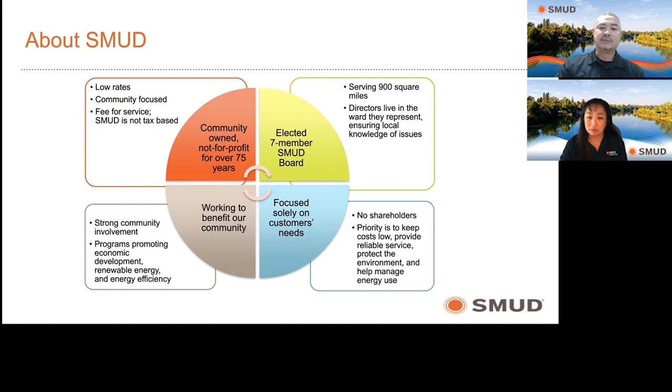One of the many things that we do as energy specialists besides doing the home energy audits is we provide classes and resources to our customers and community engagement. So some of you might see us out in county fairs, the state fairs, or regular regional fairs or events with our SMUD tents, providing some information to our customers.

Our energy assistance program rate is our discounted rate for income qualified customers. So it's based on your gross income and the size of your household, and we generate those numbers based on the federal poverty level. So those are some of the numbers and guidelines that we use to qualify you for our discount. And this is a monthly discount that is taken off your utility bill each month.

There is a recertification process. Once you get enrolled, every 2 years, we will recertify and just ask you to provide updated income documentation to see if you still meet the general guidelines to earn that discount. And as you can see, some of those discounts vary from $10 all the way to $70 a month off your SMUD bill.

So which means that, if you have a $100 bill, $70 is waived off. $30 of it is all you're responsible for. So that's a good help for your budget.

Another discount we offer is our medical equipment discount rate, or we call it the med rate. This one is for qualifying medical equipment that may be needed in the home, such as an oxygen concentrator, electric wheelchair or scooter, in-home dialysis cyclers.

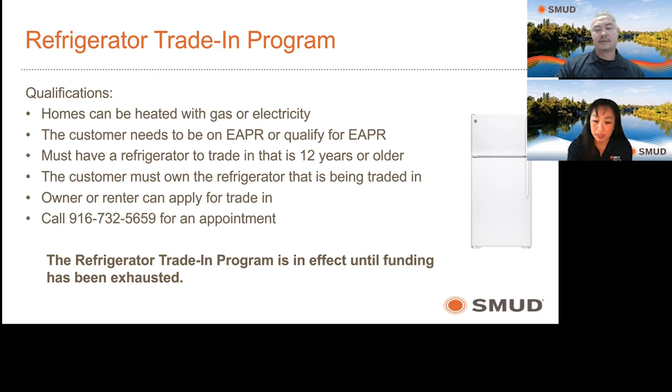Thanks, Grace. On top of our refrigerator replacement program, we also offer a free weatherization program for our EAPR qualified and EAPR customers. It applies for both owners and renters. Some of the measures that we look at are your attic insulation, weather stripping around your doors, screens for your windows, LED lighting. Also available is installing a smart or programmable thermostat. So these are some of the basic measures that we offer.

Some offers can also look at your heating and air system, as well as your water heating, depending on the age of the house as well. Typically, we look at homes that are older than 20 years old, since most newer homes should be Title 24 compliant and should have mostly high energy efficient equipment and measures in them, as well as having a quote unquote tight house where it's not going to have a lot of air leakage going through it.

So if you're interested in that program, it applies for single family homes and some multifamily like a duplex or a quadplex; we can do a free weatherization on those. Unfortunately, with apartments, it's harder to do because most of the apartment complex managers and properties will have their own in-home maintenance technician that can address your needs.

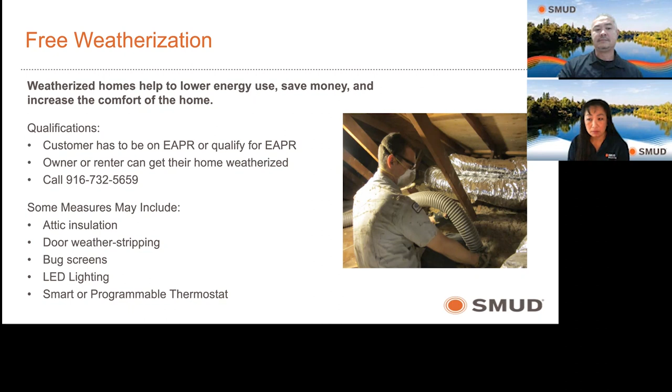So say, for example, during the summertime, you're at work, kids are at home, right? Because they don't have school. So when you're not home, they like to turn down that thermostat. With the Wi-Fi thermostats, you're able to have it on your app on the phone so that you can actually control it yourself. You can monitor the setting of your thermostat and make it stay at the temperature you set it at, so they can't turn it down no matter what they try to do to the thermostat. You can lock them out.

Or say you're away from home, you leave the thermostat off completely, and maybe an hour or two before you arrive home, or before peak is a good way to do it as well, you start up your air at, say, 3 o'clock. Right now, we don't need it, right? A couple of weeks ago, we were certainly needing that air conditioner.

So instead of letting it run all day long, to pre-cool your home you can use it from, say, 3 to 5 before the peak hits, turn your thermostat down to the cooler setting, let it run, pre-cool the home, and come 5 o'clock before the peak prices start, go ahead and bump it up to 78 to 80 or higher, whatever you can, so it won't run during those times as often as it would if you had it set lower. Next slide.

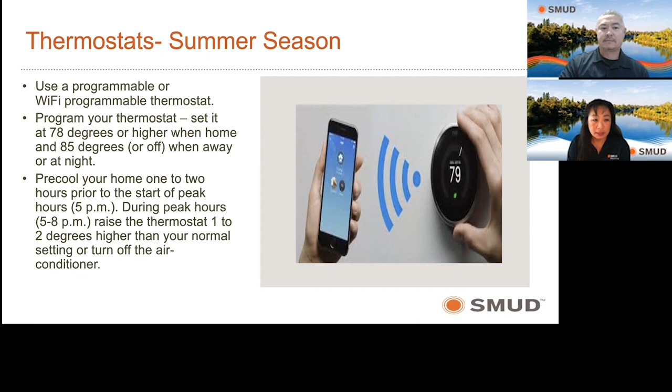Okay, so we recommend for heating setting the thermostat at 68 or lower, and then 55 at night or when you're gone. And we do recommend that you maintain the heating and air unit. Now, as a renter, you don't have control over that, right? That's your landlord's responsibility because it's not your unit.

So that's something that you want to remind your landlords about, say in the fall or spring, because that's before the season comes up. Right now would be a great time to get your system maintenance for the heater, to make sure that your heater's working properly.

And then say in April or early May, that's when you want to remind your landlord to come service that heating and air unit for the air conditioner portion. Because if you have them do it during the summertime or the wintertime, the heating and air folks are going to be very busy, right? So it's going to cost them more. They're going to have a delay in service sometimes.

And so just be proactive in letting your property manager or owner or whoever you rent from know. Have them come out and take a look at it, make sure everything's working right, and let them know if there's any problems ahead of time, right? Because they don't live there. They don't know if you're hearing noises, and if the tech comes out and can't replicate it, they won't be able to tell what's wrong with it.

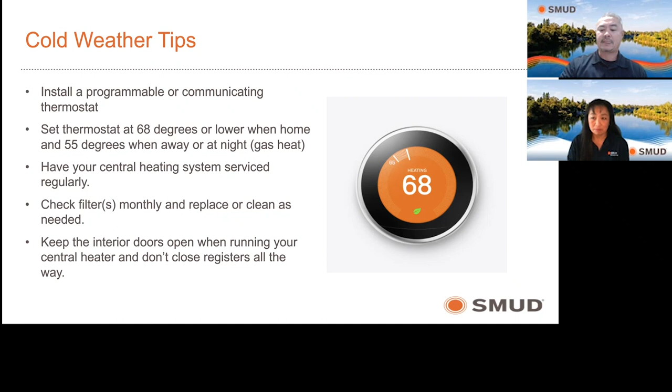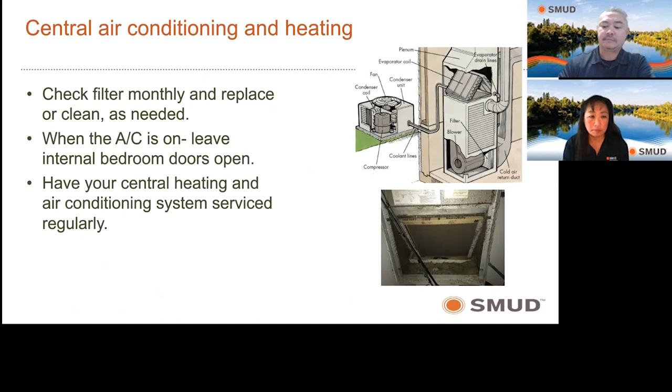Okay, so here are some supply air registers. So the top one, top left, it has the grill. This particular one is usually a one directional type of air register. The way that the fins are going upwards, this particular one is going up. The one to the right on the wood floor with the hand there, that one's on the floor. So there are some air registers in some homes on the floor.

A lot of times when we're out there in the field doing audits, we will see people put furniture on top of it. They put a couch on there, or they'll cover it with a rug because they don't like to see it or what have you. But it's really important not to block these, because it impedes the airflow and the comfort of the room, right? You're covering one of the vents, it's not going to work.

Bottom left-hand side, this is a multi-directional. So this one here, usually you'll see this in a larger room. So probably in your living room, possibly kitchen or some other multi-room space. So this one has the fins going to the left, to the right, and then also up and down. So you will see those in that application.

The one here on the bottom right, that's open. That's how you can tell it's open, because you could see the darkness in between it. And there's a latch there where you can adjust it. So say for those rooms that maybe you don't want too much air going in, or you don't use it that much, you can still leave it cracked open. You don't have to leave it all the way wide open if you don't want to, that's fine.

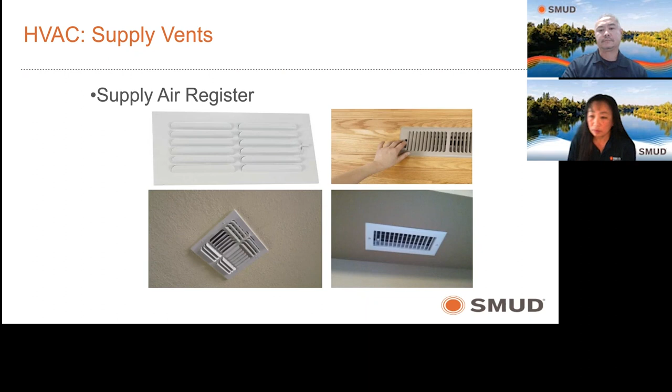So this is what it looks like in the attic. Most people don't normally see that. So what you see here is what they call sloughing. So this is the carrier of where the air goes through from your system to those rooms. And so it's in a multi-phase here.

So the top picture, I guess the best way to explain it to you is basically you see a slinky that's got like a plastic cover on it. Then you got the yellow part, which is the insulation over that, right? To keep the temperature for the cold air and hot air. And then normally there's a plastic covering over that. It could be plastic, it could be black, it could be gray, it comes in different colors, but that normally keeps it together.

When this sloughing happens, then basically things start to come apart because it's in the attic, it gets hot. When you don't get good airflow, your temperature warms up, right? The attic's hot. The air in that ductwork will start to warm up or cool down depending on the season. And so this really should be taken care of by a heating and air professional, right? They need to come up, tape this back up, and cover all those back up.

Now the question is, if you had asked about the closing of the air register, right? If you close an air register, this can happen on the bottom picture. This here is a broken duct, which means that it created negative pressure in the ductwork and it's popped off, or sometimes there's real small holes. It'll open up and then it ends up breaking that duct. So in this picture here, this duct is now cooling or heating the attic instead of that room that it's supposed to. So that's something too that you want to let your landlord know, right?

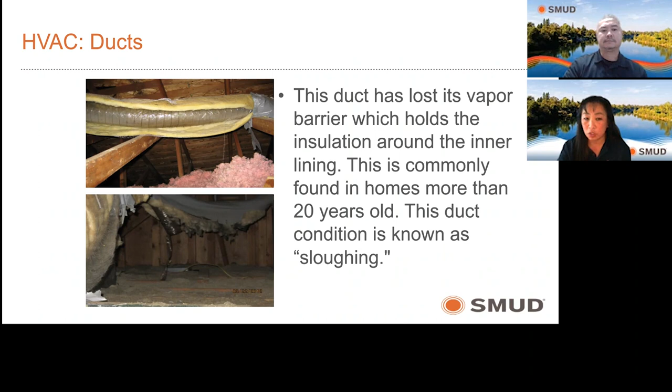Next slide. Ceiling fans. So ceiling fans are great to have in a home. It's great for personal preferences. Some people like it cooler, and so if you want to turn on a fan, that's great, instead of adjusting the AC for the whole house, right? Especially if you have a lot of different people's temperatures in the home. So ceiling fans are great.

The direction during summertime is forward. So the top picture up there, the air should be blowing down. When you turn on your ceiling fan, if you're standing underneath it, it should be blowing downward, so that way it can move the air around. During the wintertime, if you want to help warm up the home, you put it in reverse. There's a little switch on the base of the fan where you can turn it to go the opposite direction. We do recommend that you dust the blades off first and then have the direction go the opposite way.

In some homes, if you don't have a ceiling fan, since you're a renter, then that might be something you negotiate with the landlord. Maybe you tell them, hey, how about I buy the fan and you hire the contractor to go ahead and install it. That way, it was installed correctly. It's not on you, but you might have to leave the fan after you move. So that might be something you consider asking your landlord, and then compromise to see if they will be willing to do that.

The box fan here in the bottom, you'll probably see that if you're driving by some apartment complexes or even homes. People have put fans in the window. This is creating kind of like your own whole house fan effect. You put the fan in there and you pull in the cooler air from the outside, because sometimes the breeze isn't going the right direction for that particular window. So you can put this fan in here, pull in the cool air, and then open another window to get the hot air out. That's a great thing to do in the early mornings or late evenings when the temperature's gone cooler.

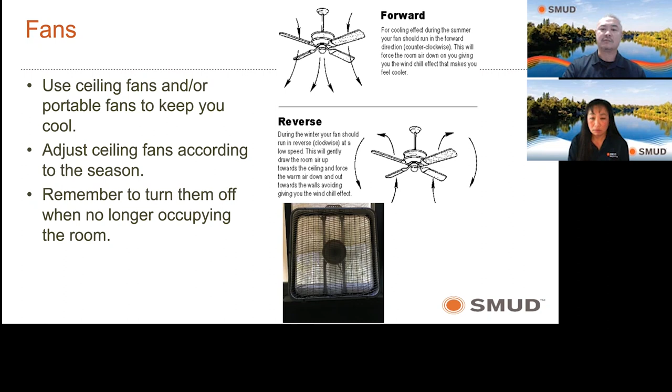Okay, so reducing the internal heat gain. I'm sure we all grew up with parents that told us all the time, turn off the lights, right? So lights do add heat to the room. If you are still using the old school incandescent bulbs and haven't switched to CFLs or LEDs, then they will get hot, especially if you have a light vanity in the bathroom. A lot of builders put those in where there's like 6 or 8 bulbs. Those types of bulbs tend to get very hot, and it will add heat to the room, and some other types of lights do as well. So that's why you always want to turn off the lights when you're not in those rooms. And it adds a load too, like Mike said, every little bit counts towards the kilowattage at the end of the month, right? So make sure to turn off the lights that you're not using.

During the summertime, it's hard. I mean, peak time of day is right during dinner time. So in order to try to not have to run that AC so much, we do recommend that you try to use something different, like a microwave, right? Cook earlier or the night before and then reheat. Or you can use other types of appliances. Nowadays, air fryers are really popular, Instant Pots, electric cookers, things like that.

Yes, they use electricity, but they definitely don't add to the heat at all in your home, right? I mean, it's very little, it's very small amounts. So it would be best to use those, because once you turn on your stove or your oven, it's going to get hot. And even though you might have the window open, it's going to be very hard to get that heat out of the house at that point. So that would be something to consider doing.

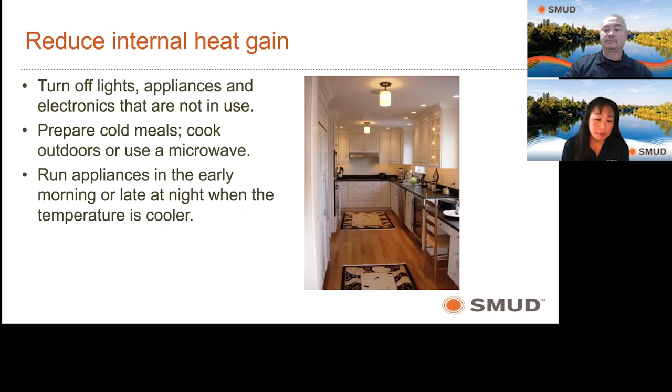We've run into it in the past where we go to homes and the house is being heated by an open oven door. So yes, a no-no. That is very expensive, especially if you have an electric stove. I've done a few audits where the customer's heater may not be working or they don't find it to be hot enough, and they've used their electric stove or oven to heat the home, and that bill is going to be very expensive. You know, that's a 220 appliance, so that's running the heat quite a bit, and that's going to raise your bill. It was several $100s for 1 month just for that. So that's not the best way to heat the home.

Okay, reducing heat gain, air leaks, things like that. So things that you can do, this might be something that your maintenance person does, or this could be through our weatherization program. If there's gaps around the windows or the doors, then you want to make sure that there's caulking around that so the air and the cold and heat can't come in through that.

And then for the light switches and outlet plates, there are things like a gasket that can be put behind the plate, and that's what that bottom picture is. That's a foam gasket that goes behind there. Doesn't impede the switch or anything at all. You don't even really see it because the plate covers it. But that's where air comes out, because if you were to remove that, there's actually a box right where the switch is, and sometimes there's gaps around it, so there's air coming in and out of there. So making sure to have the gasket on there will help to take care of that.

For those of you that have fireplaces, hopefully, if you've been using it lately, you want to make sure to keep the flue closed when you're not using it. It will let heat and cold out of there, and so it should be easy to do. There should be a lever to open it. If not, there should be a latch somewhere up in there. There's a latch that either goes left and right, or you pull towards you to keep that door closed.

If it doesn't stay closed, then when you're running your heat and air, it's going to go out through the chimney, through the exhaust. So then you need to let your landlord know so they can get a chimney person to take care of that for you to make sure it closes properly.

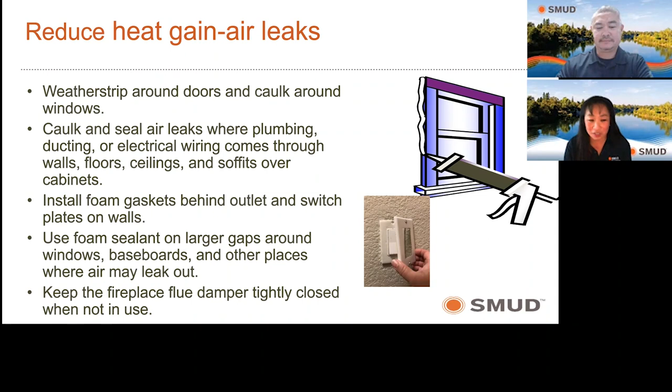And so if you can see outside, it's open. So you need to make sure it's closed. You shouldn't see anything in the chimney. But also, before you use it, you do need to make sure it opens, because if you don't open it before you use the fireplace, you will get the backflow of the soot and smoke coming back into the home. Okay.

Okay, insulation. So this is just basically showing insulation. Like Mike said, apartment complexes, it's really hard. They don't allow us to do checking up there in the insulation for the attic. So this would be more for the single family homes and duplexes, folks.

Basically, insulation is, think of it as like a blanket for your attic. It's hot on the roof, right? So that heat is stuck in your attic, and then that hot air is trying to get through your ceiling to come into your home. So this insulation is like a blanket. It's going to slow it down. It doesn't prevent it completely from coming through the ceiling, but it's going to slow it down some so that not so much of that heat and cold is coming through the ceiling, right? Because then your heating and air is basically not going to be as effective.

So you want to make sure that there is good insulation where you can find your attic access point. Usually it's in a closet or in the hallway, things like that. So if you want, you can have them check it, or we can come out and check it too. If you're part of the Energy Assistance Program discount, that's part of the weatherization that we can come out and do.

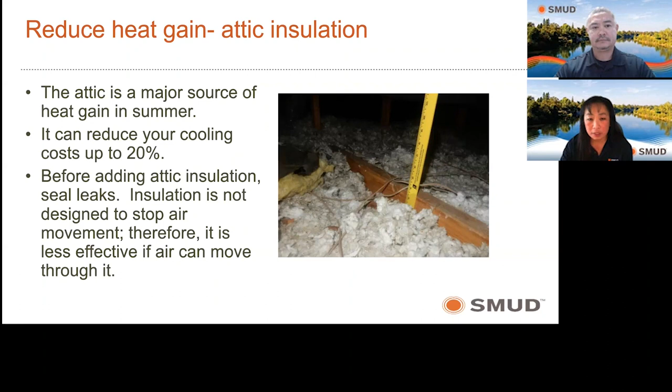Okay, next slide. Okay, reducing solar heat gain. So this can go for any home, really. These are showing examples of what you can do to cover for the heat coming in, right? As a renter, you're not going to make home improvements on your owner's property. So, these are ideas in case you're looking for some.

For the top picture up there, it's kind of like a roll down shade. Sometimes it's a crank, sometimes it's roll down, pull down. That's a shade, it's usually a screen, so you can usually still see through it, and it just doesn't let the heat hit the house so much. So most likely there's a front door behind this screen here. Some people also use this on their patios if you're in an apartment, and some people use the screens that way, or the bamboo shades like this, or patio umbrellas.

And then for the inside of the house, it's best to use this kind of drapes here on the bottom left picture. The sheers are nice and pretty and all, but they don't do anything to protect you from the heat and cold coming through the windows. So what you need to do is find something that's thicker, something that doesn't have the light coming in this way and blocks out the heat. It makes a huge difference.

And so just for myself, I know that when we had the 115-degree heat, on my patio slider I have some drapes, and I took the temperature. My floor inside the house was 85 degrees because the sun was shining on it. But once I closed it, it dropped 10 degrees, and that was just a few minutes. So basically you're giving shade to the inside of your house. You don't want your furniture to get faded or anything.

So, that's why we recommend to keep the windows, blinds, and drapes closed during the summer. Wintertime, though, open it up. Let that heat come into the house, because then you won't have to run your heater so much.

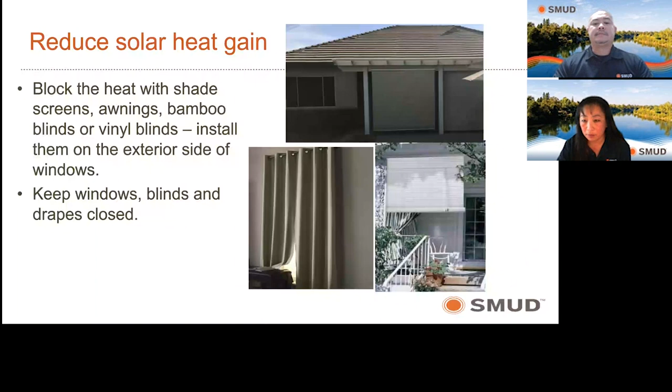Okay, plug loads. So this is just basically showing all the electricity that we're going towards, right? Back in the day, 1975, your biggest user was going to be TV, radio, and that's pretty much it. As time advances, practically everything is going to electronics, right? In your own home, in most rooms, you're going to have at least 4 or 5 things plugged in per room, and people don't think about that. Now there's security systems, Wi-Fi, cable boxes, things that back in 1975 you definitely didn't have.

In the future, 2030, 2035, you've heard on the news, I'm sure, regarding electric vehicles. So that's going to be adding to your load as well. You're going to be charging a vehicle soon. So basically we're just letting customers know that there is a trickle effect. Even things that are not being used are still plugged in. A lot of things have a light, a timer, a clock, something programmable on there.

It's still drawing a little bit of charge, and so that will use some electricity. To hopefully try to mitigate that, you can use these smart power strips. The one on the bottom is a smart power strip. So how this one would work is, say you put your TV on one plug, and then you put your DVD, VHS, surround sound, gaming systems, what have you, in the coordinating plugs. So if the TV's on, those items will have power. But if the TV is off, those things don't have power. So that's kind of more of a smart technology, right? To be able to cut it off.

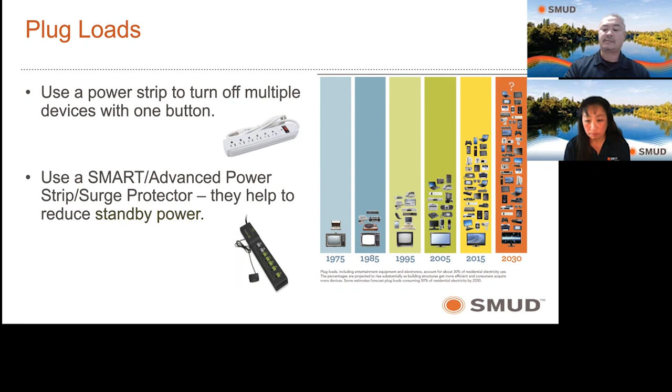If you guys are all SMUD customers, you're well aware of our time of day rate, which is the way we charge our customers for the electricity they use. When you use it determines how much you're paying for that electricity. In the past, it was the amount of electricity you use. So regardless of when you used it, you got charged the same amount.

But with time of day pricing, especially during the summer, it's very important to be aware of when you're using major appliances such as your clothes dryer, your dishwasher, especially your heating and air system, or an electric vehicle. Being aware and trying to shift your usage away from those peak hours is going to save you some money on your electric bill. It's going to use the same amount of electricity, but it's going to be cheaper because of when you use that electricity.

A good example is if you have an electric vehicle, or if you're a renter that has a pool, you want to charge your car or run your pool pump late at night. Early morning hours, that's when the electricity is cheapest. During the non-summer months, the only thing that you really need to worry about is 5 p.m. to 8 p.m. The rest of the 21 hours, you're good. They're off-peak hours. So it's going to cost you the same amount outside of that 5 to 8 p.m.

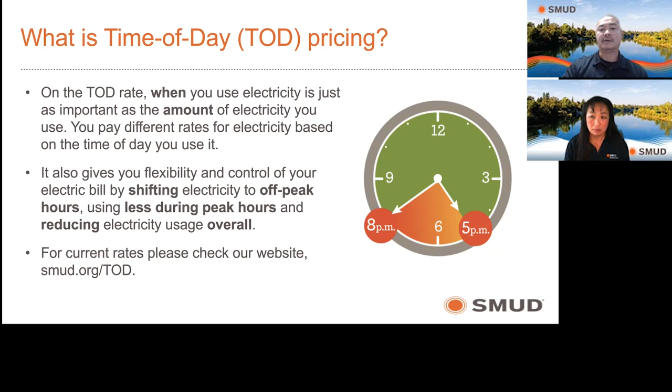So what can you do at home? Reduce your usage, doing your laundry early in the morning or later in the evening, or some dryers and dishwashers now are equipped with delay timers where you can load it and set a timer for it to run later on. Take advantage of that, running them during off-peak hours. Pre-cool your house in the summer, going a couple degrees lower before that 5 o'clock hour. Then when 5 o'clock hits, you can bump up your thermostat a little bit, and it's going to run, but not as often, so saving you a little bit more money.

And then, like I said, take advantage if you have an electric vehicle at home and you have the electric vehicle discount from SMUD. From midnight to 6, you get a penny and a half per kilowatt hour discount in your house, not just for your electric vehicle charging, for the whole usage in the house. So take advantage of that.

If you want to run your laundry during that time, if you have one of those delay timer clothes washers, use it and run it during those hours. Or if you have a pool pump, run it during those hours. That way you save your off peak, and then you benefit from the discount that your electric vehicle rate is providing you as well.

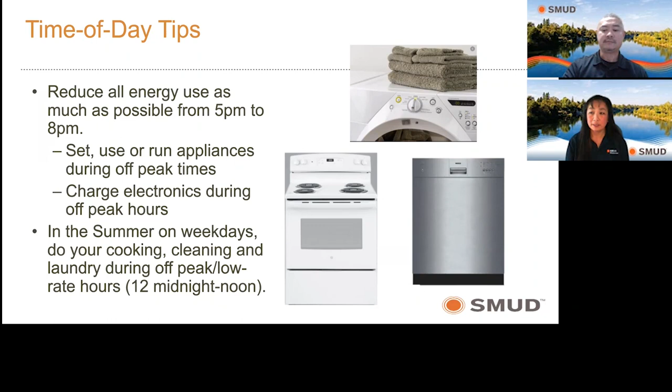Christmas is coming up; they usually put LED Christmas lights in there at a discounted rate. So something to think about, if you guys are shopping for energy efficient equipment or appliances in the home, take a look at the SMUD Energy Store. Maybe there's something there that you're interested in that we're able to provide for you.

With that, that is the end of the presentation. Once again, thank you for taking an hour or so out of your day to join us today. Hopefully this was helpful and beneficial. If you guys have any questions, you can put them in the chat, or if you're interested in our weatherization program and think you qualify for that discount program that we offer, reach out to us at smud.org. And we can definitely try to help you out and maybe even conduct a home energy audit at your home.